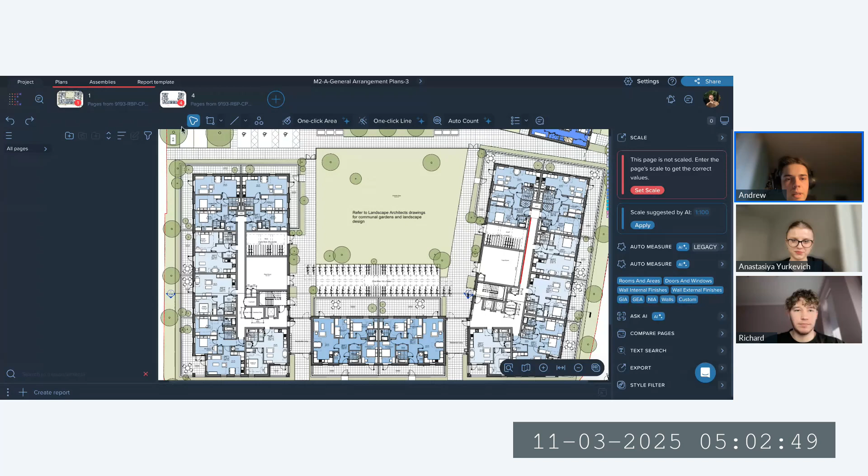So for the auto measure feature, we can see there is a custom category prompt, and we can use it to put our custom keyword there and try automating the takeoff of some specific request. I'll put my elevation plans there just as an example. Let's see how we can work with this one. I will scale my page, and when you open auto measure, you may notice this custom prompt. Once you click here, you will get the field to input your keyword, and we can try different ones.

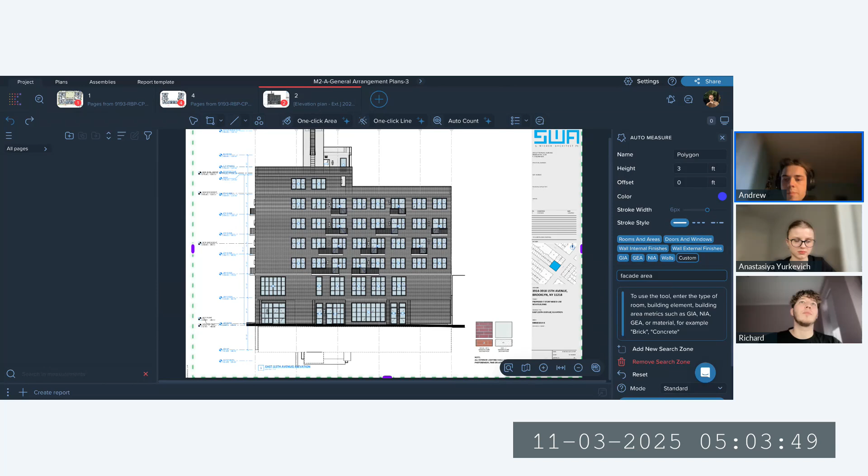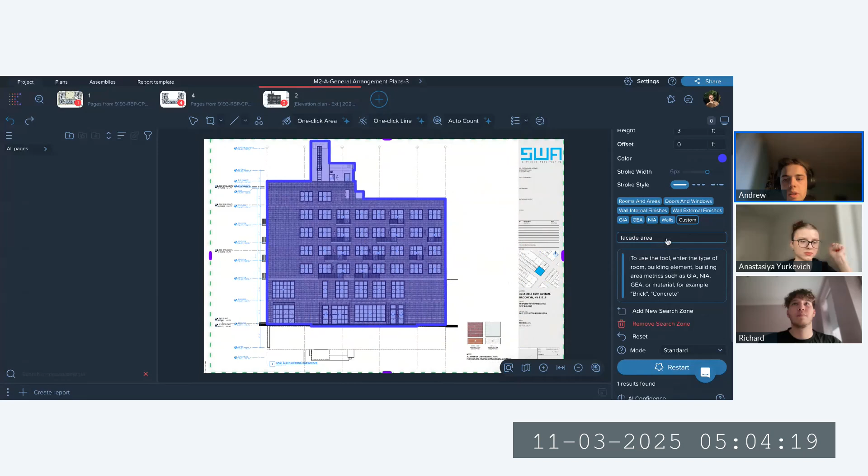Let's say facade area. Now auto measure initiates the search, and we see how it processes the facade drawing and identifies the facade area. So basically, this category is prompt sensitive - depending on the keyword you put there, you will get different results. Once it finishes the takeoff, you will see the suggestion. In our case, this is one result for the facade area, this purple polygon.

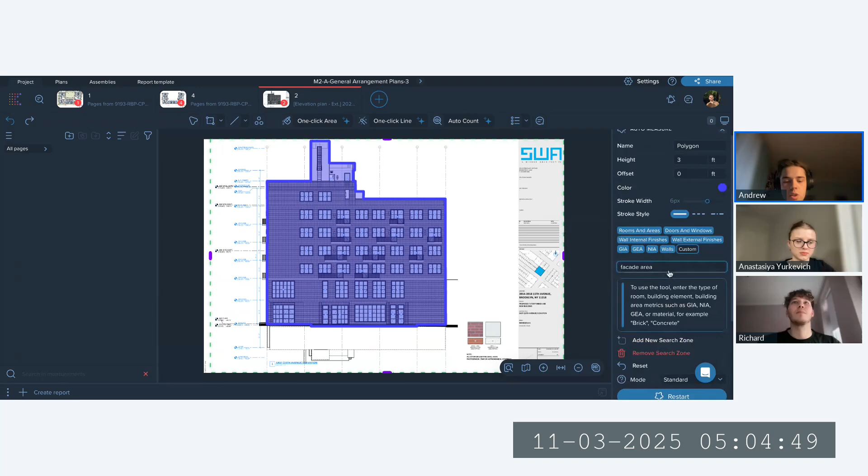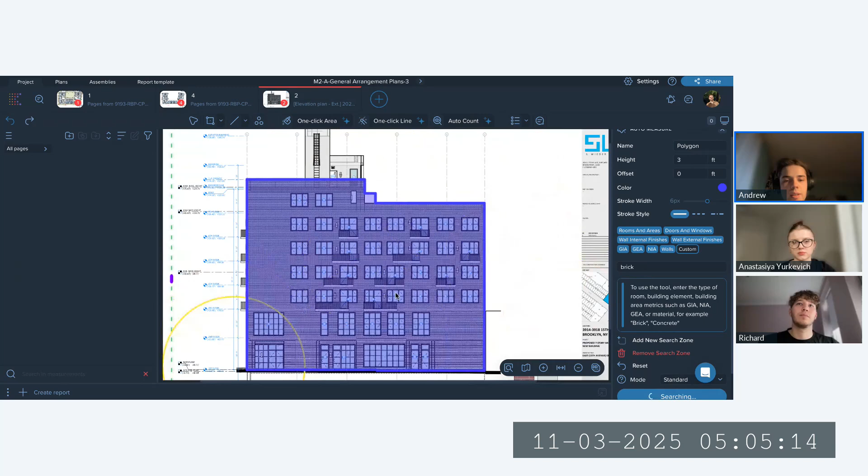We can also try different modes and play around with the AI confidence to see different configurations. But generally, to give an idea of how we can get different results, I will just change it to brick. As you may notice, this area on the roof was included, but if we input the different prompt brick, now we see that the result is different. So it's always worth trying different keywords for different drawings, and depending on the results, moving forward with creating or adjusting them using this functionality.

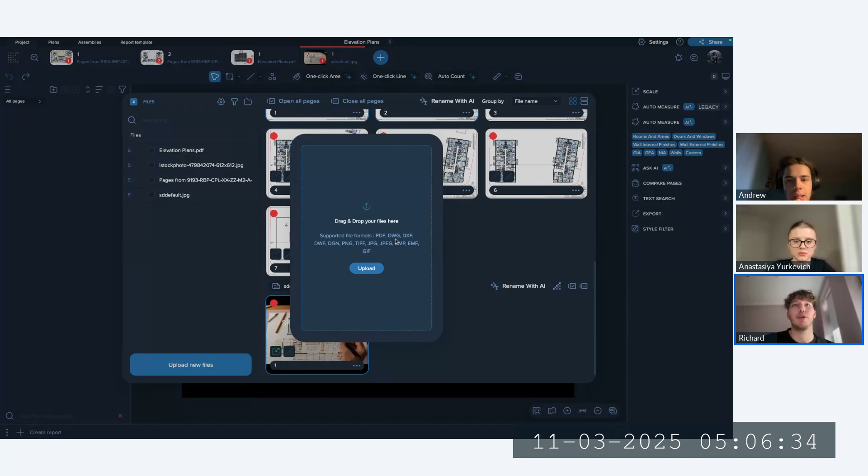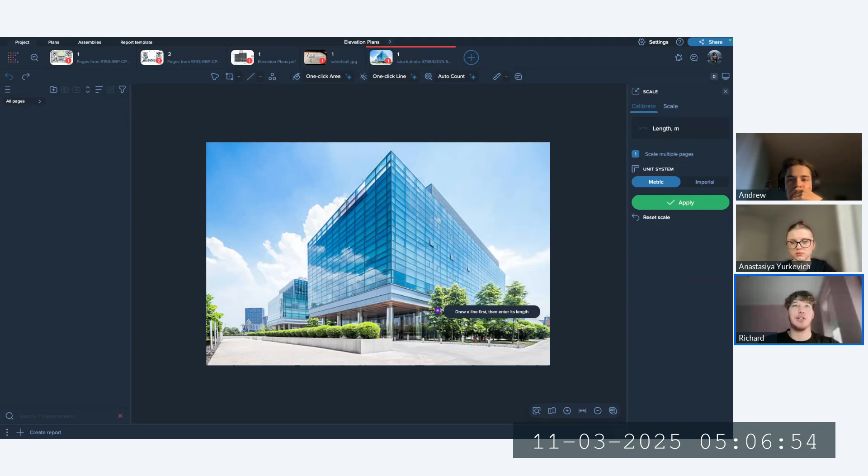You can upload any file in any format, even if it's low quality. Just for example, I took some random picture here, which isn't even a drawing. If we try to set a scale for this picture, it doesn't work to get the takeoffs done. But just to demonstrate that AI will work anyway, if I choose one-click area and click here, AI will try to measure the entire facade from the drawing. I can press create and get this measurement.

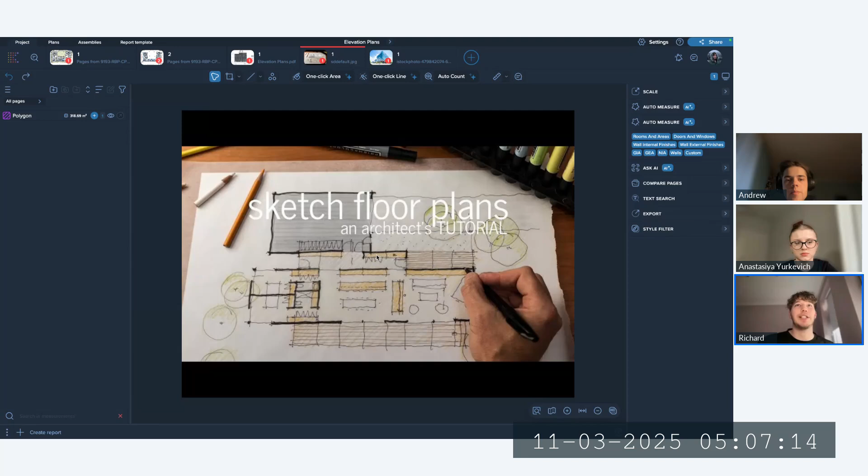As another example, I took another picture from the internet. It's really very poor quality, but even on this kind of drawing, Kreo will work and try to measure. You can easily say you want to include some other part of the drawing, like here, and get this area. Then get another area for some other part here, and make a click. So it's not a big deal if the quality of the drawing is really poor.

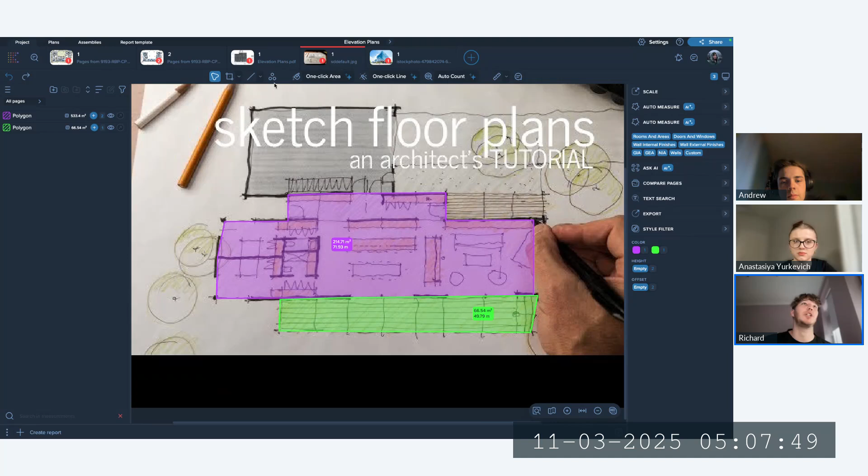Don't worry, Kreo works with any kind of quality, no need to be extremely accurate. But the best file format to upload is PDF, though DWG also works nicely, and pictures work okay too.

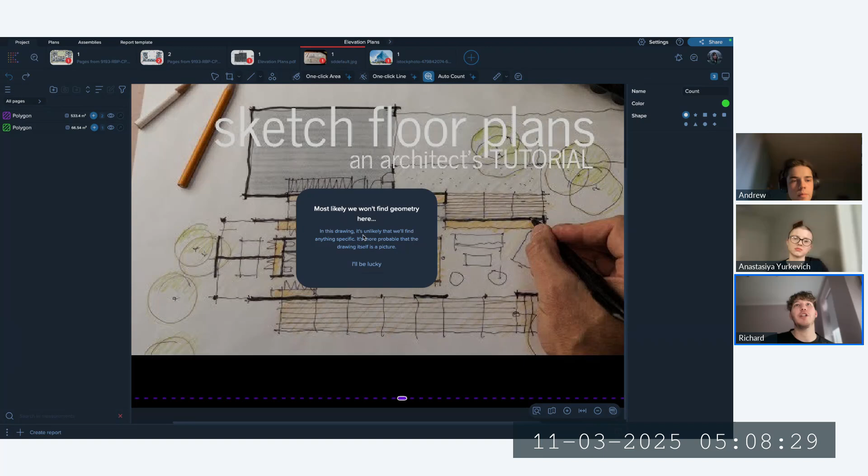So auto count works only with geometry, and you can see this message here. If you press auto count, it says most likely we won't find any geometries here, so you get a notification that this feature wouldn't work. To make sure auto count would work, you can choose auto count on a proper drawing, and now you don't have any notification.

If you highlight something, you see in yellow and red all the geometries which will be taken into account while searching. So all features except auto count work on any drawing, but auto count doesn't work on pictures. Low quality drawings are okay, but pictures, no.

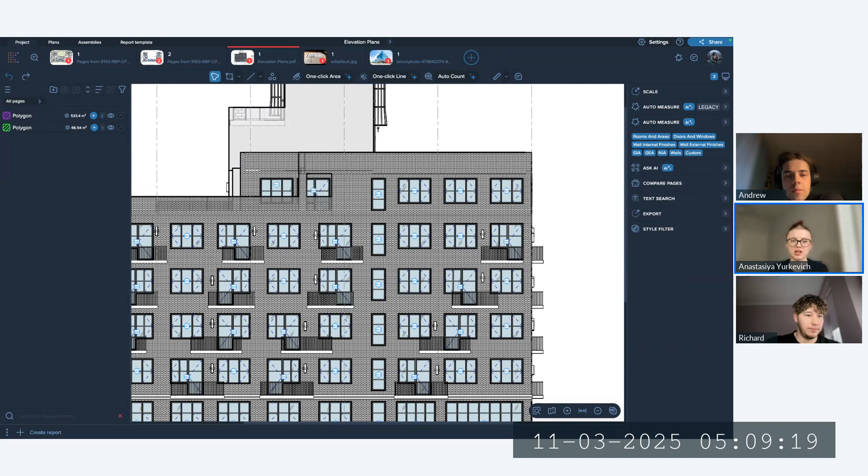That's it. Before you switch to a different drawing, we have a question - I believe it was referred to the previous one that Andrew answered. Can you omit windows? If we build a facade and measure the facade area, can we remove the windows from the polygon? I believe the question was about this part.

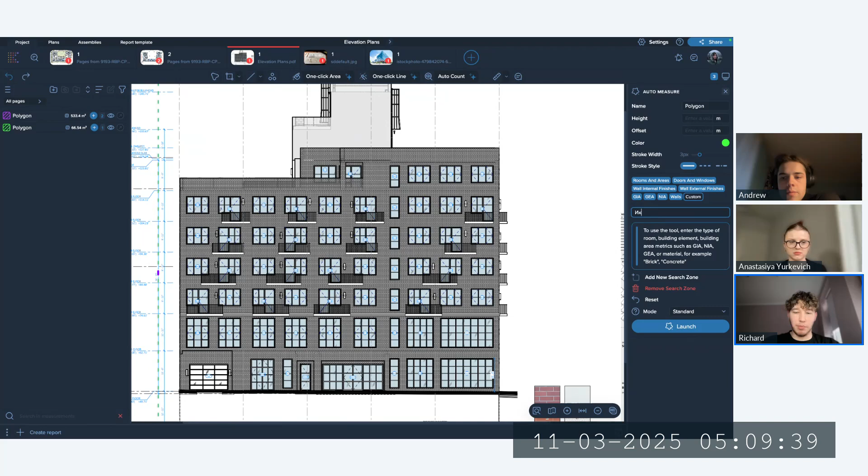So here again we have a couple of different tools like auto measure or one-click area which can give you facade area. As Andrew already showed, I go to custom category here, and input like brick. Kreo will go through the drawing to measure this particular elevation.

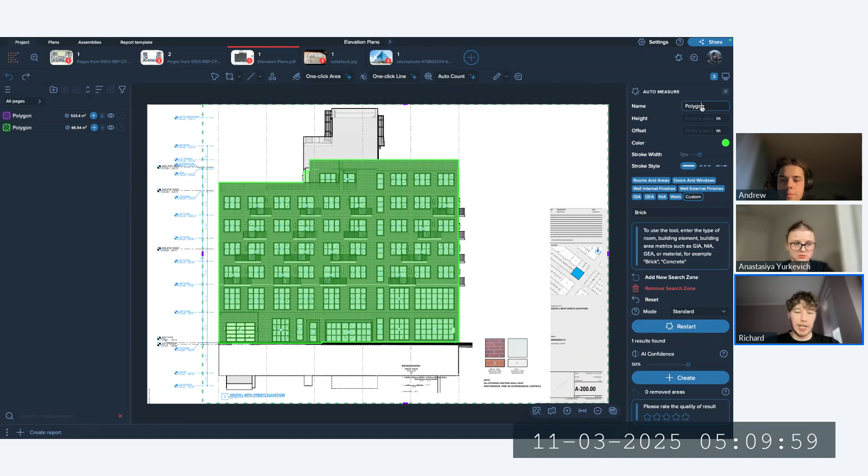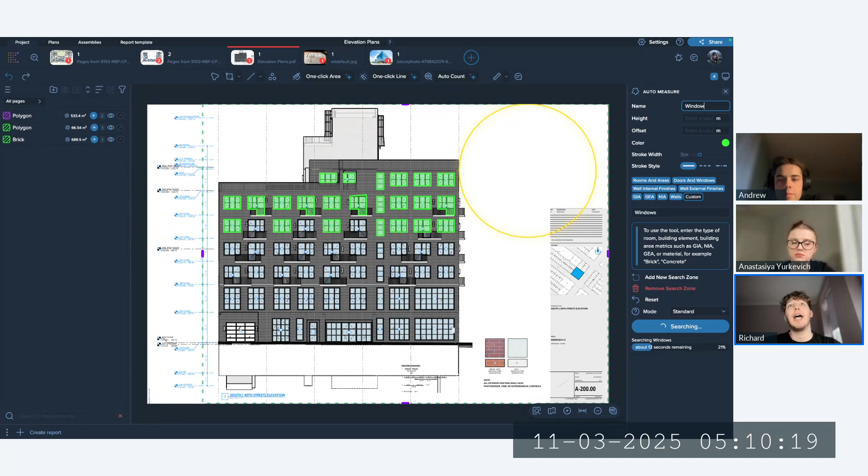Then we need to get another measurement for our windows. So window areas here, let it finish for a sec. I give it a name, brick as an example, and press create to have this measurement done. Then I go here and input my windows, press launch to start the AI. While waiting, I'll rename my measurement, window as an example. Now AI goes through the drawing trying to measure all the windows.

Then we can deduct all the windows from the elevation area. I can try to use AI confidence if this area is not included - AI confidence allows you to control how many measurements you get in the end. Then here I press, let me change the color to purple, create, and now I have both areas for my brickwork and for my windows.

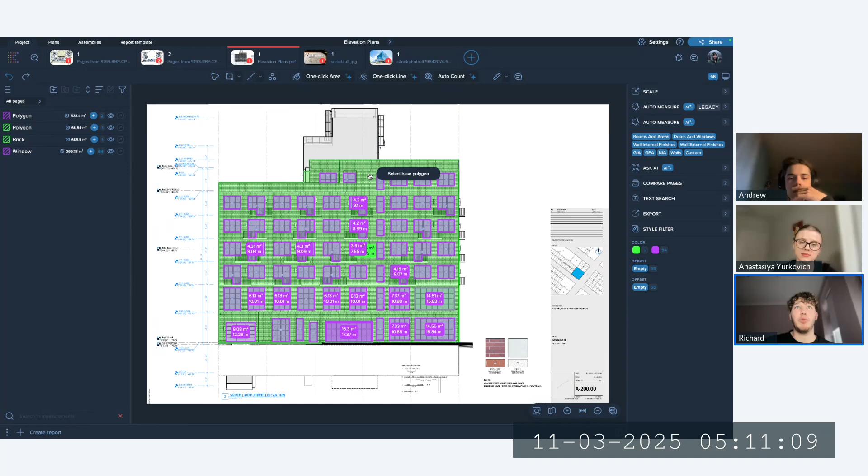What I do next is choose all the measurements, and on top I have a subtract feature. If I press subtract, Kreo asks me to select the base polygon - the polygon from which I want to remove others. I click on the green one because this is my base polygon, and here I have some options.

Keep polygons like my windows - if I want to keep them, but just for demonstration I'll unselect this option because I don't want to keep windows, and press apply. Now I have all the areas deducted. The same works if you want to deduct just one area or lots of different areas from the entire elevation.

Yes, and it works with pretty much everything, not only windows, but kitchen worktops and everything, right?

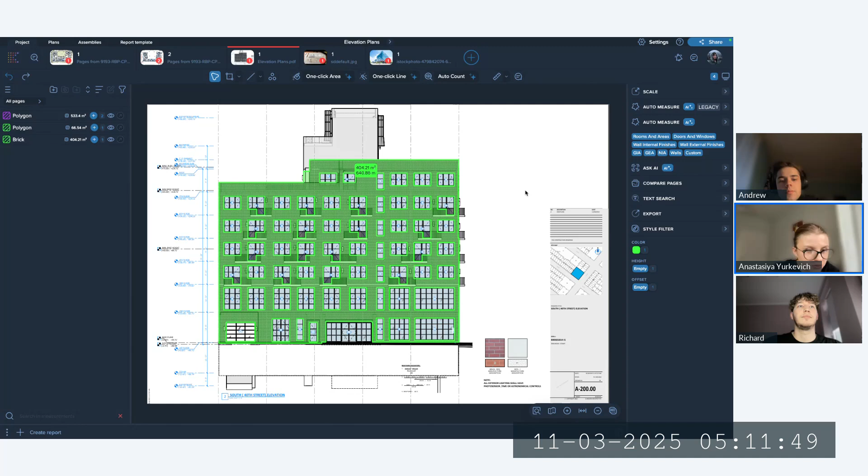Let's proceed with some other questions. I saw a question about the roof pitch, how to measure roof area which is pitched on a plan view, because my previous software allowed me to input a pitch value in degrees.

This is really nice question about the pitch. Let's say we have some area with a pitch here. At the moment, we don't have a default pitch option as an input, we only have height. But there are two main ways how to input your pitch.

First of all, Kreo has a spreadsheet page. You can move your area into one cell, move to cell area, and then input a formula with sine or cosine to calculate this slanted area.

Or another way is to go to the item assembly database and set up a formula which will calculate your pitch. As an example, I have a floor, but I can duplicate it and name this floor as a roof, with all the same things.

So here I can add my pitch formula. Pitch is usually a number, so I add pitch, and I know it's in degrees. Let's do it like that. Great, so now I have pitch input in my roof item.

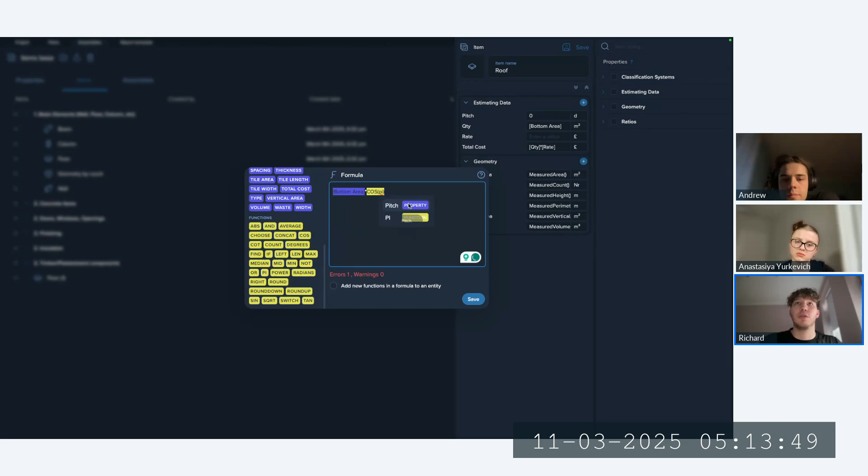What I can do next is take this pitch into account using some formulas. We have default functions which allow you to measure it. I say like that, and then I need to input my pitch, so you'll get the slanted roof area for your measurement. Let's see how it works, I press save.

Now I have this area. I press choose and assign my roof item, so now I have some extra things I can calculate based on this. Let's see it in the table with items, where I can see my quantity and pitch as well.

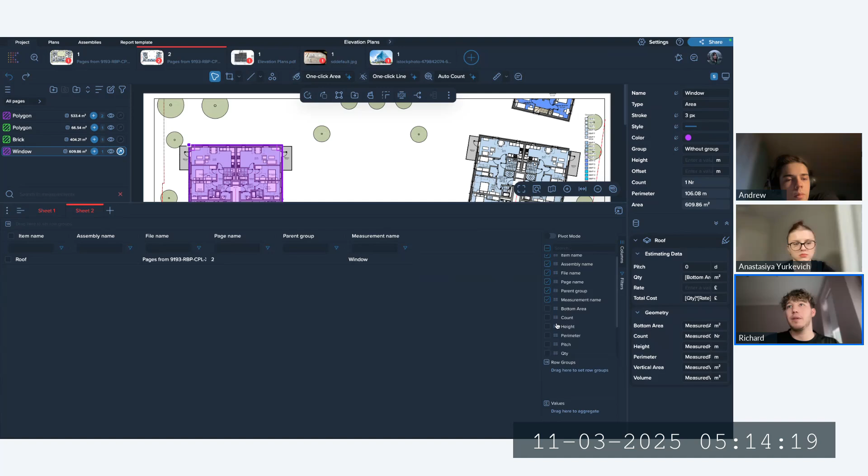You see, pitch at the moment for this measurement is 0 and quantity equals area. But if I input pitch, say 45, I get another value here. So using this function, you can calculate the right value for your pitch.

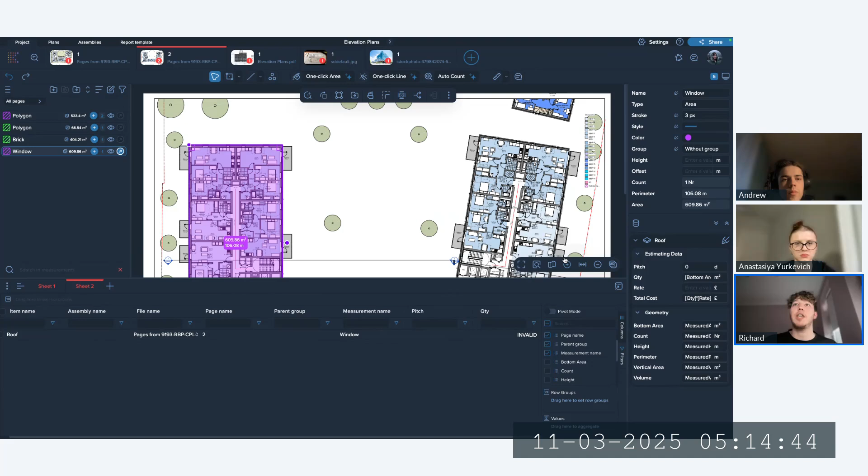If you have any concerns with that, just drop us a message, chat with us, and the Kreo team will help you set up everything about your roof measurement in the most convenient way, whether using the spreadsheet page or the item assembly database. And you only do it once, you don't have to create the item each time, you just create it once and it's always in the database.

I have another question about the database: which NRM sections is your software strongest in and which is weakest, and why? If you mean about AI, basically AI can measure anything related to any section. Tools like one-click area, one-click line, and auto count allow you to measure mostly any type of measurement, whether linear, count, or area, for any type of drawing.

As an example, one-click area works for anything. If I need to measure this area, I just make a click here. Now AI analyzes the entire drawing, and now I have this area. In the same way, you can go to any other drawing and use one-click area to get any other thing.

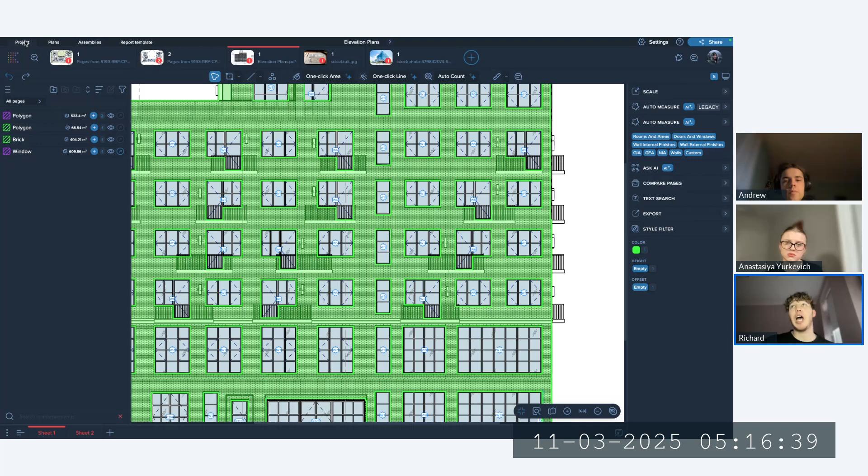In Kreo you can have some kind of breakdown property - this is how it looks by default, but you can extend this with your own extra detailed code. So basically any section of NRM can be measured in the same way, not a big deal. The only exception is auto measure, because that works mainly for chapter 2 and 3. If we speak about MEP sections, you need to use other tools, like auto count or text search.

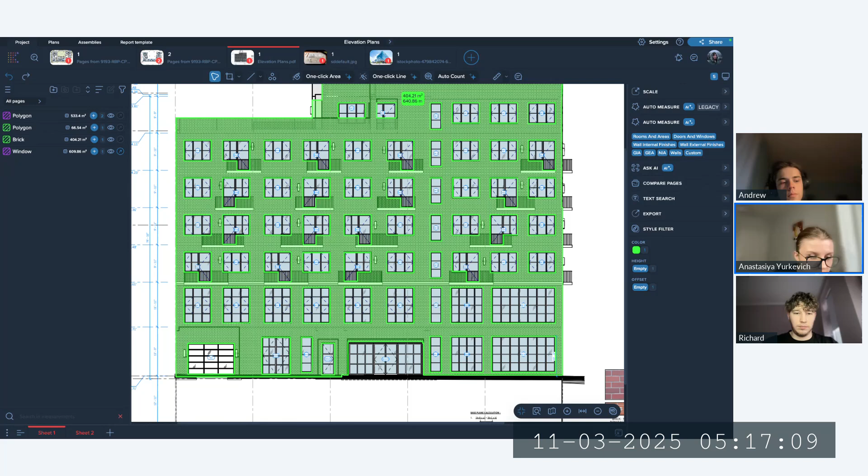I have two similar questions, so I'll ask them together. First, how does your model handle project-specific conventions and unique measurement rules? How do you offer users the ability to train or fine-tune the AI on custom drawing sets? And second, can the AI learn from our past projects to improve future takeoffs? Can the customer train the AI on their drawings, and will the AI learn from the work done?

Yeah, this is one of the most famous questions, I would say. If we speak about automatic training, AI doesn't learn from the measurements you do, because in some cases you might not do it exactly as it should be, maybe to save time or stuff like that.

So AI only takes into account the drawings included in our dataset. If you see something going wrong on your particular drawing, let us know using the email or chat with us button, and the Kreo team will include your drawing in the dataset to support that kind of drawing too. At the moment we have about 1 million drawings in the dataset. Most floor plans or elevations are included, but some specific, overloaded drawings with lots of information can go wrong. We're constantly teaching our AI when we face new drawings.

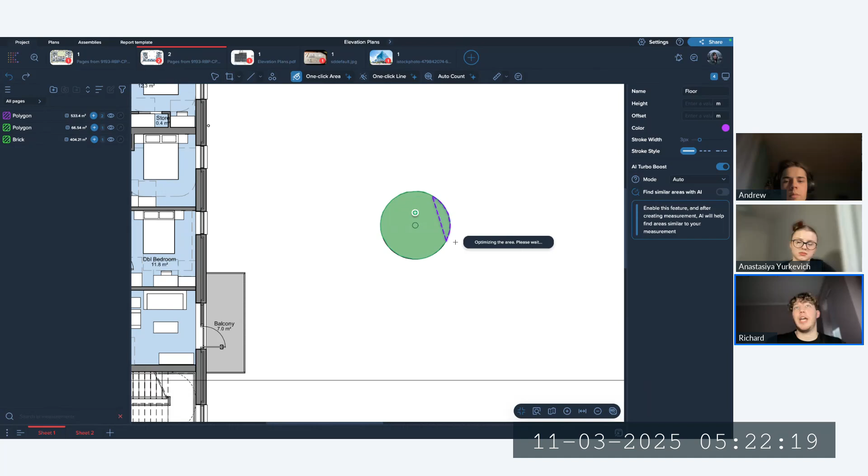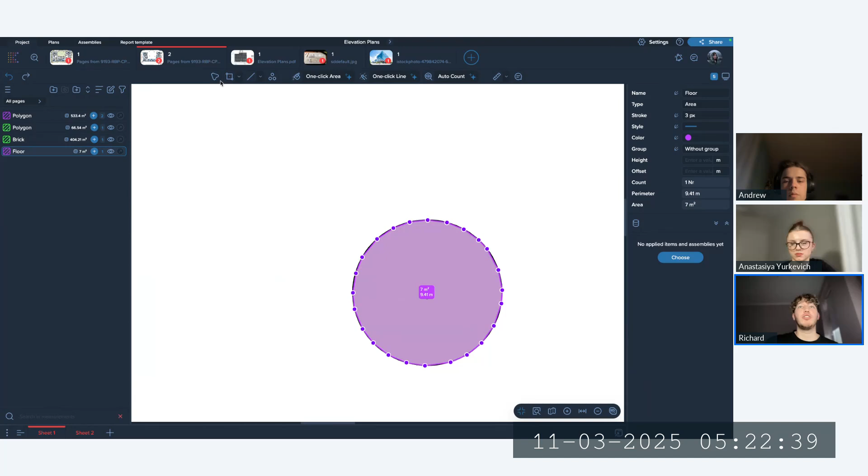Okay, so basically, if you have any kind of shape like that, AI can measure such kind of things without any dots here. So you see, AI measures this circle perfectly, but if we speak about the arc tool in Kreo itself, no. So if you need to measure any arc, you just use regular tools or AI tools. They will measure it perfectly, but you can see here that we just have lots of linear sizes, which are smaller.

So in the same way, you can measure it manually, just like that. As an example, you choose the polygon tool and just set a bit more points, just like that, to measure kind of circle shapes or arcs. So this is how it works here. Again, AI has no issues with measuring this in a really nice, accurate way. Thank you for the question.

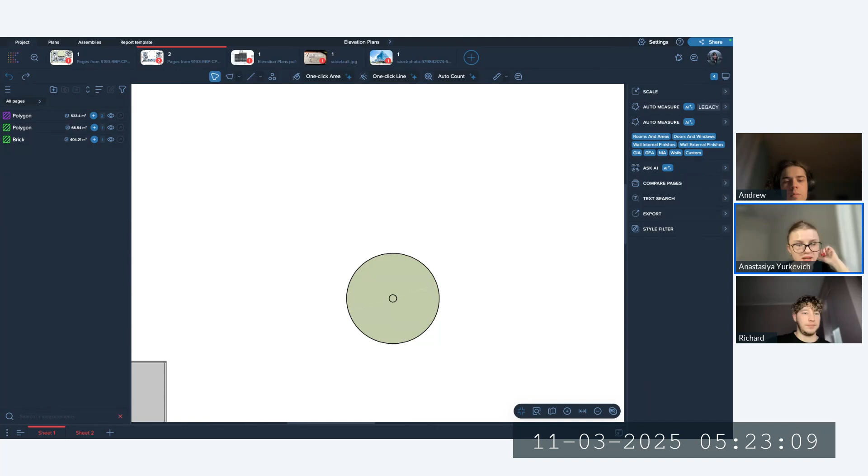And the next one: can we export the markups to edit on other PDF editing software like Bluebeam, or are they only editable in Kreo? So yeah, all the measurements are editable only in Kreo. If you export all your measurements here, you'll get a PDF with the measurements on top of your drawing.

Here you have lots of different settings: which pages you want to export, which styles you want to apply for your drawings, which measurements - all or only visible, because you can hide some measurements and not export them - and some other options like, for instance, company logo, which you can export like a watermark and so on. But all the measurements will be non-editable after you export them in the final PDF output.

And we have some other question. Can you show me some examples of the different formats that data can be exported into from the Kreo software? Say, for example, if I want to transfer data into an XLS format, so Excel format, and estimating programs.

So it's about the estimation export. Here you have, first of all, a couple of different types of reports. As I already created, we have a spreadsheet page. Here we'll also have some table with measurements, which is very configurable. By default, it's just a flat list of your measurements, but you can easily configure how it should look like - just as an example, maybe where I want to see only my measurements and the total area.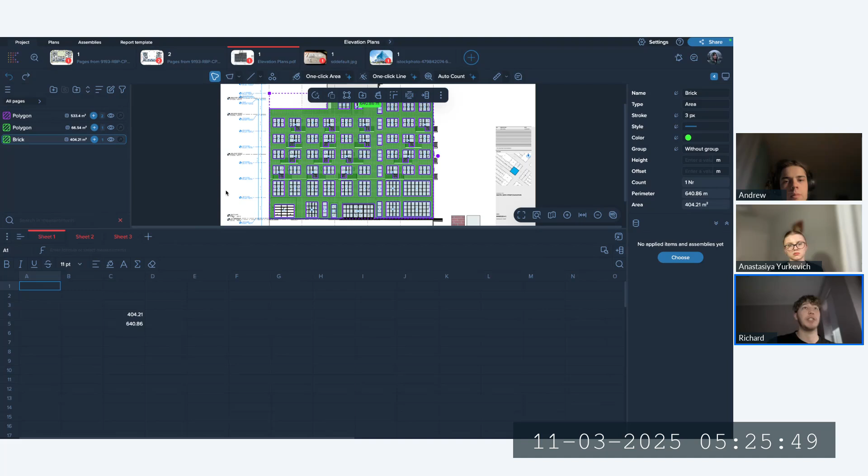Additionally, you can export it to CSV, and also with our API integration, we can set up direct integration with any other software you would like. But if we speak about output, the main file format which is available by default is Excel, and you can also export this to CSV, in addition to exporting your drawings to PDF as well.

Thank you. Can I add custom information for each markup? For instance, a specific column to add the specification reference of the item I'm measuring. Yeah, here we have a special item assembly database, which is done just for that particular purpose. So how it works in the item database: you have properties, and you can create any property.

Just as an example here, you see I have NRM breakdowns. I have some estimating parameters like quantity, rate, total cost, maybe type. And you can use any other parameter, which can be text, numeric, or, like you can see here, my type is a single select list, from which I can choose one particular value.

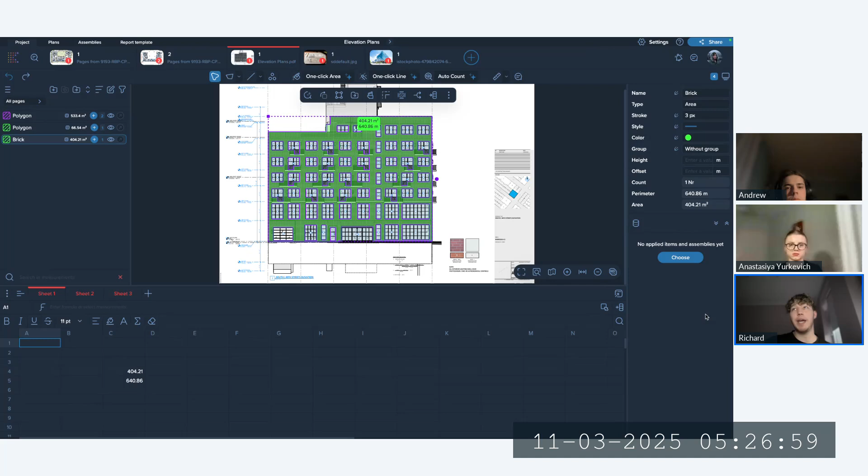So the only thing is to set up your database initially. Again, here we can give you as much assistance as you need. But then after you set up some custom properties you need, you can fill them in for all the measurements here in this right panel, the same as you have these default properties. In addition, you always have this option where you can add something new right in the Kreo project - you can add a new item, add new properties, and stuff like that. So this is how it works.

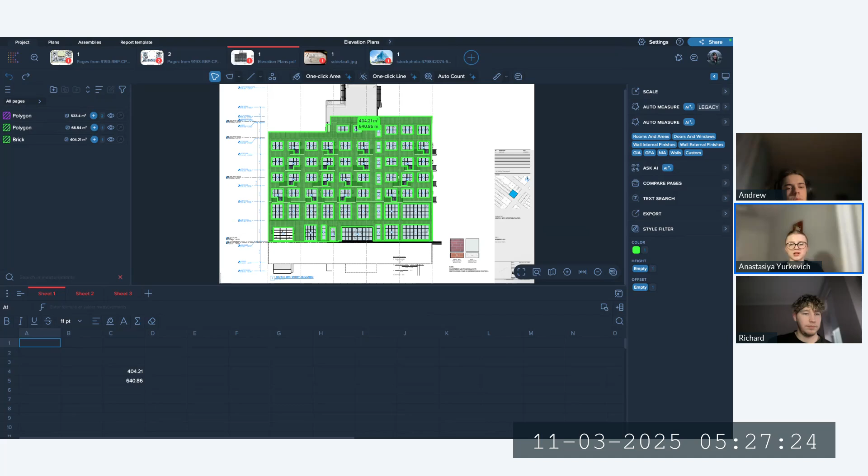Thank you. And I have a very common question: please show us how to scale all pages at once.

Yeah, so in Kreo, if you set a scale, first of all you can see this scale here. It means that this scale is applied for that particular page. I can open this page, and if I go to the scale option, I go to scale multiple pages.

So this menu allows me to choose some other pages which have just the same scale. If I see that these 3 other pages have the same scale, I simply click on them, or I can choose the entire file here, like that.

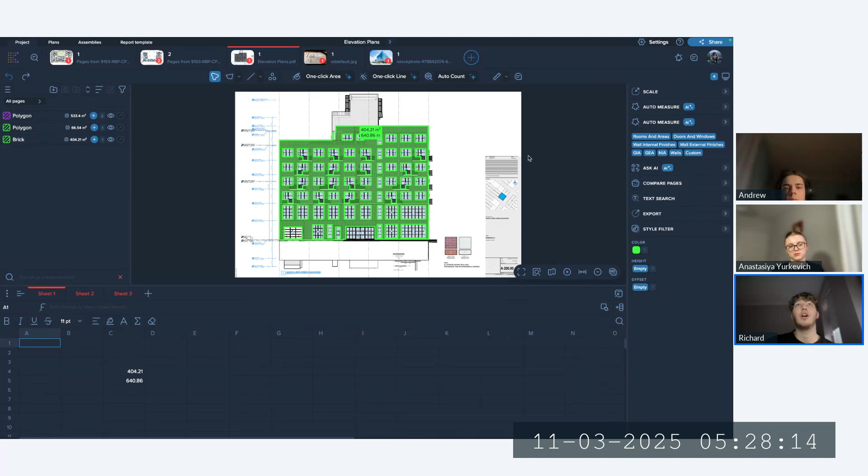So I have 4 pages selected, and now if I press apply, I apply the same scale for all other pages. I just do it like that, go to File Manager, and now you see all these 4 pages are scaled except this one.

So the same, you can go to this page, go to scale, scale multiple pages, scroll here, click here to scale the entire file or choose the entire file. In that way, all the pages are selected. You can see 7, and press apply to scale all of them at once, like that.

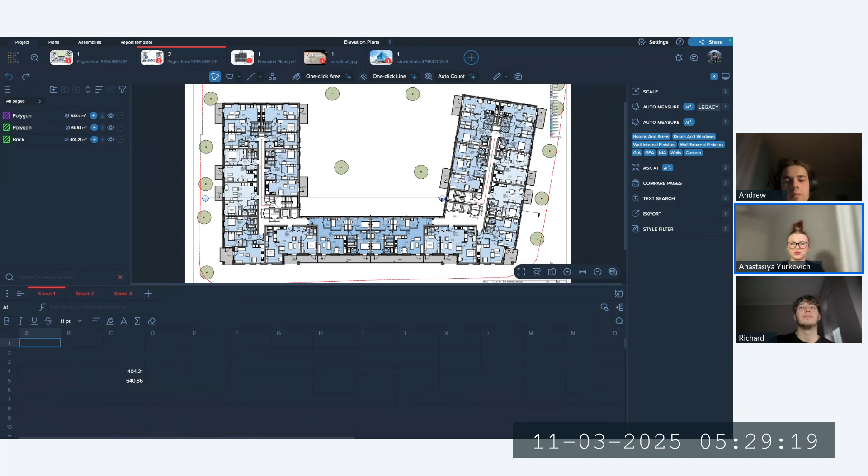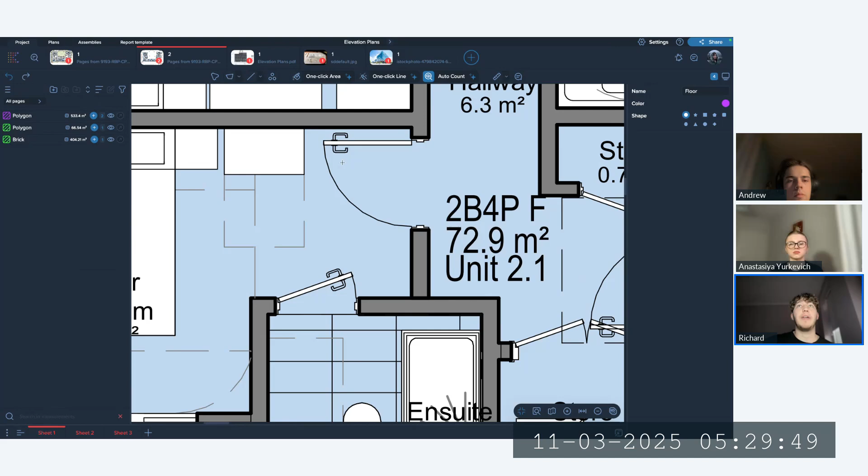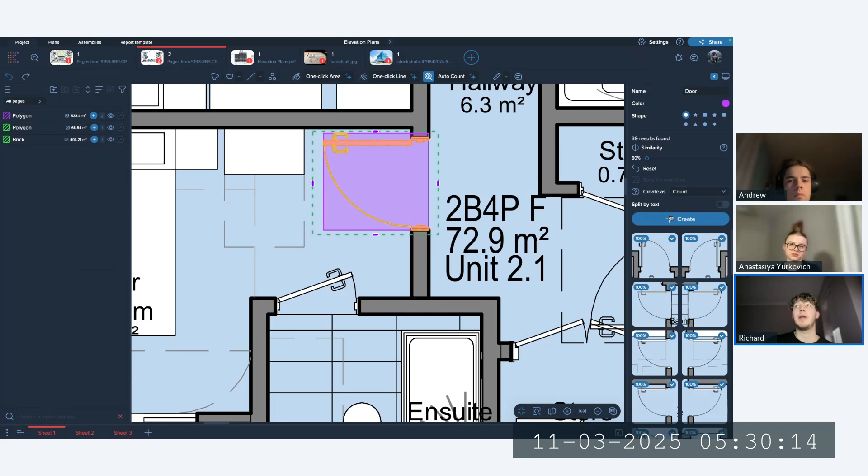With auto count, I can highlight this door, and I can press search to find all the same doors for this page. Let me rename my measurement, door. And now I have a really nice button called Save for Next Time. So if I press Save for Next Time, I can easily go to the next page or previous page. I click Save for Next Time, press Create to have my measurements for my door.

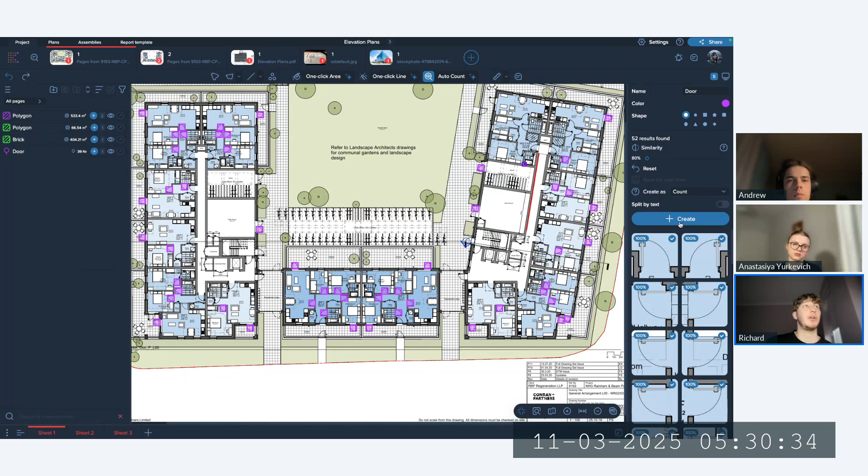I go now here, I go to auto count, and here I have previous launches. I can click on that door, and now Kreo will automatically launch the search based on your previous drawing, but for the same element. Now you see it's correct, you press create, and now you have two measurements from both pages. The same works with elevations here.

I want to highlight another important feature: in case you have any text annotation, you can use auto count for it as well. I just highlight this element on my drawing. I press search, one second. And now you see Kreo finds all these elements, but they are included as one category, W5, 6, and so on.

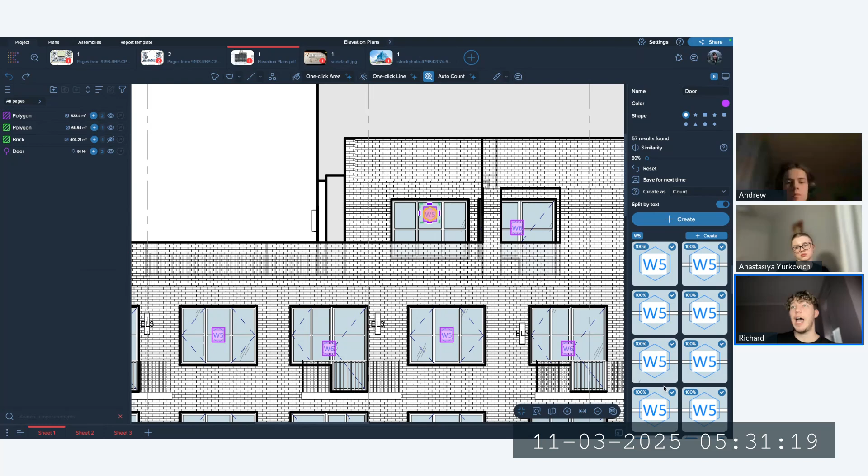Then I can choose here special options, split them by text. And if I press split by text, now all of them are divided by the text inside. So you can see that they are basically split by all these types. Before pressing create, I press save for next time, press create now here, and I have all these types here.

Now I can simply go to the next drawing from the set, let's say that one. Again, go to auto count. I have already saved search, click on that saved search, and now Kreo tries to find all the same things, but on that drawing. Please note that here, if some elements are not highlighted, it means that they have another geometry.

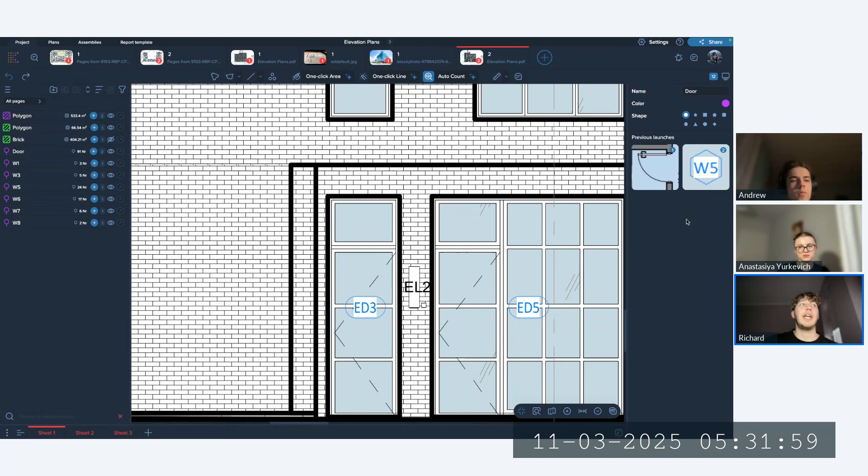So now I use these things to count all the same things, press create, and I have all these measurements from both pages simultaneously. So you can count geometries on multiple pages, not at once, because it would be really hard to validate them.

You see, if I go to this drawing and launch auto count, I have lots of different results. You need to validate them and make sure that all of them are correct, that they are exactly what you wanted to include. And at the same time, you can easily go to the next page with no need to highlight any other geometry again.

You just choose from the already available list. It's some kind of legend of your searches. And you just click on this type, on that type, and find all of them on the next drawing.

To be honest, it's one of my favorite updates. I believe everyone who works in MEP or counting doors and windows should go and try this new auto count update, because I'm talking about it all the time. So yes, hope you like it.

A couple of other questions. Do you offer API access for firms that want to embed takeoff automation into their internal tools? Yes, we have API access. We have our default API, and we can also provide a customized API based on your particular needs. You can integrate Kreo with another software using API or any other tool, so not a big deal at all. I believe the person meant to ask about the takeoff AI tools specifically - can we create an API to embed takeoff automation? It depends. It would be better to hear the particular request, but I think that the answer is yes.

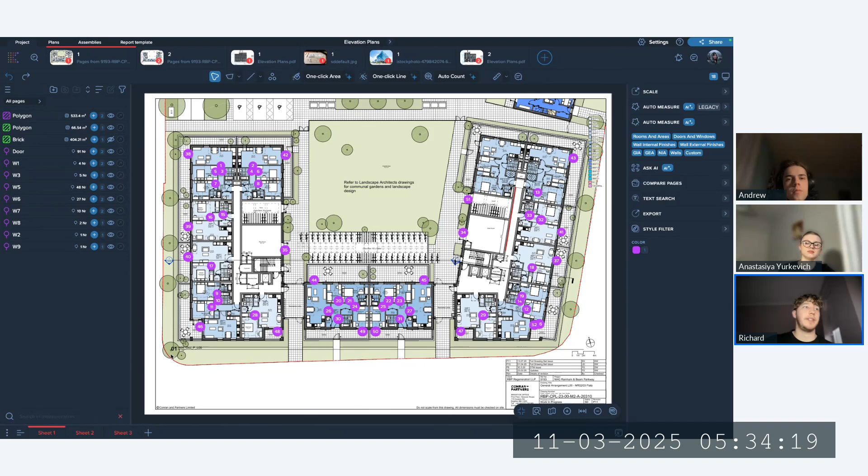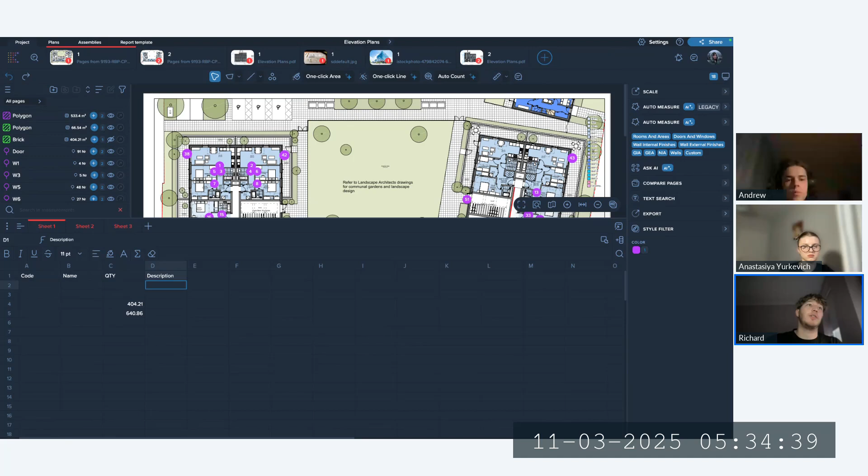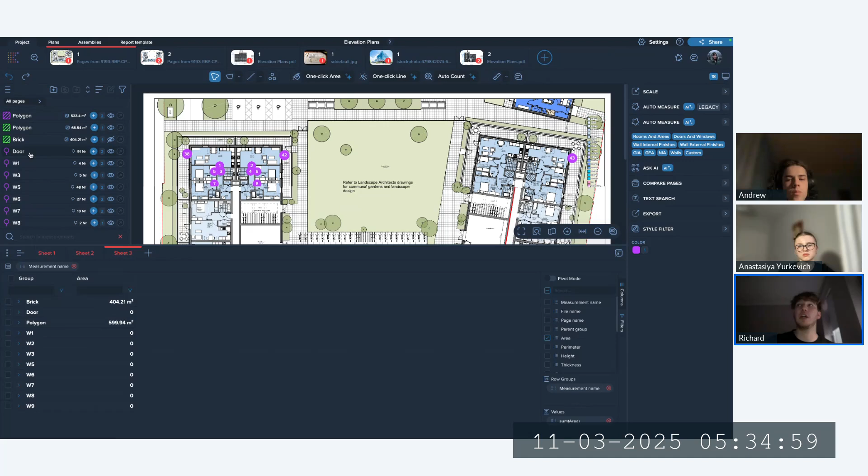So how customizable is your platform to align with our internal standards? Can we add descriptions to the markups before export? Yeah, here it works just in the same way. If you use Kreo spreadsheet page, you can have a couple of different columns just as in Excel, like code, description, name, quantity, price. You can export this to Excel just like that. You can also use these tables to export all the measurements in the way you need, with options like file name, page name, parent group, and so on. We don't have a description field for the measurement by default, so you can use measurement name, or group name if you use groups, or go to the item assembly database and create a description field as an additional property for your measurements. In the end, you can easily export all the data in any format you need, aligned with your internal standards, with all the descriptions in any order you prefer.

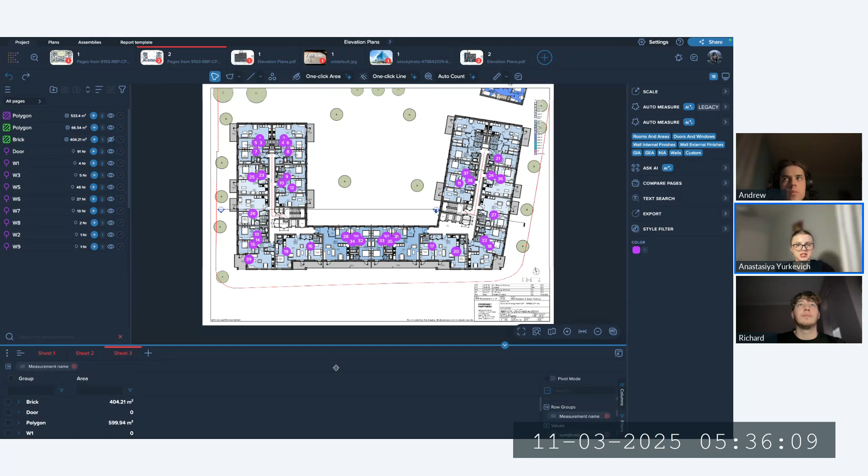I just wanted to add that in the database you can add pretty much everything except for images - codes, descriptions, prices, markups, everything can be added there. Everything you add will come as a column, every property you add, and you'll be able to see it in your items report. That's a question we've been asked a lot of times. Everything you create in your assemblies database will be presented in your items report later - description, codes, markups, cost, total cost, everything. And if you need our help adding anything to the assemblies database, just let us know. Andrew or Richard will have a call with you on what to add and how to see it in the report. It's not a problem, just let us know if you want to build a database - we will help you.

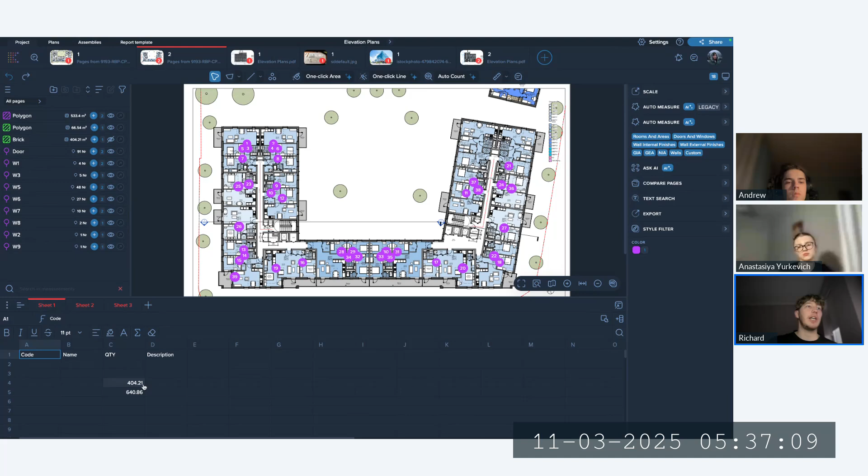In relation to exporting data, can you export all measurements and descriptions as one file for a preset of measurements rather than individually? Yes, again, it's completely up to you. Kreo outputs allow you to configure any kind of output you need. If you export a spreadsheet page, you just choose exactly how to organize your data, because it's just a spreadsheet page. If you use the takeoff report or table with items, you have a bit more limited options, but anyway you can export all measurements and descriptions as one file - not a big deal. You can split them by descriptions rather than measurement name, using description as the main parameter, but initially you need to create that description field in the database, as we said before.

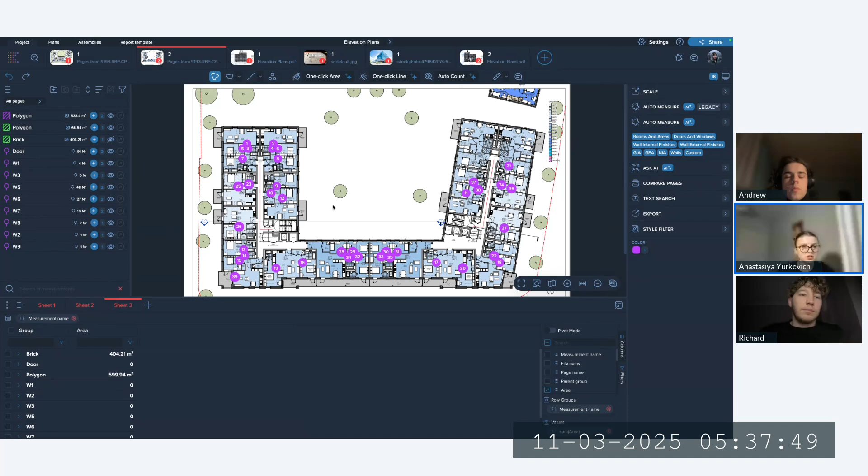How do you manually include the missing doors on auto count? Okay, yeah, this is a nice question here.

If some elements are missed, first of all, it means that maybe they have another geometry or another size. You can see on this drawing that this door maybe is missed, but if we choose auto count and highlight this door, press search, Kreo will find all the same doors from the drawing. So it's just another type. These doors are wider, bigger, so they are another type. You can create them as another door count if you need to unite them into one category.

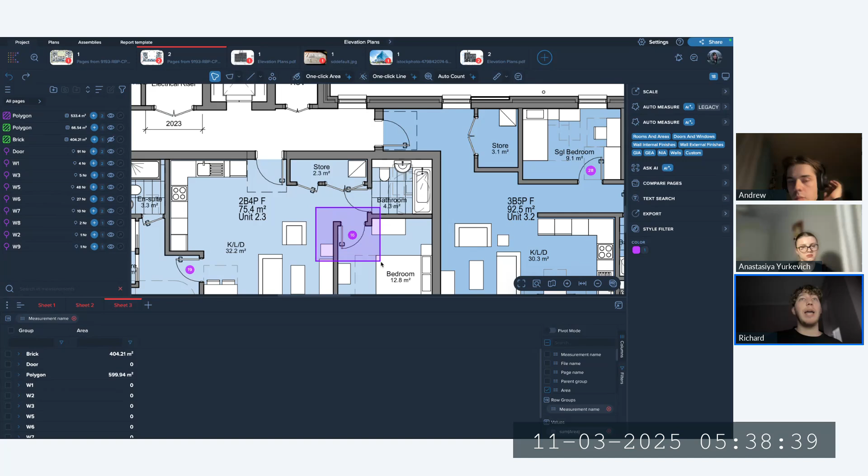So if you speak about the case when the door is really missed, I mean we don't have enough doors, you just choose the particular count you want to continue, and here you have a button called continue. You just continue creating points manually, adding or editing the measurement which was created by AI. Not a big deal at all.

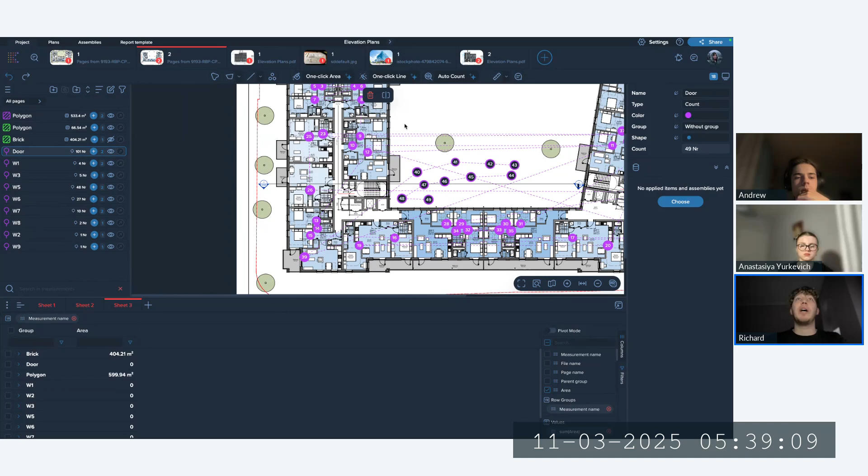You can add these points, and vice versa, you can delete some points. All the modification tools are available here, so you can simply choose these points and press delete, or split them into a separate count. Again, if something is missed, make sure that this is just the same thing that should be included, and if yes, you can easily include them by launching auto count again for another geometry, or include one or two points, or as many as you need, using the continue feature.

All right, thank you. The other question: what feedback have you received from clients who switched from other AI takeoff tools?

We receive really a lot of feedback on that point. First of all, it's the speed and the lots of different categories that Kreo can measure. If we speak about tools like one-click area, one-click line, and auto count, they work for any drawing, and you are not limited by a drawing type. You are not limited by anything here.

It works for any type of drawing, any quality, and so on. Additionally, Kreo is a very comprehensive and flexible software. You have a really nice item assembly database which is mostly unlimited, where you can create any parameter to keep your price there, formulas, anything else. Additionally, you have a spreadsheet page, so if you prefer, you can use one software to build your report and keep all the links between your measurements and your output.

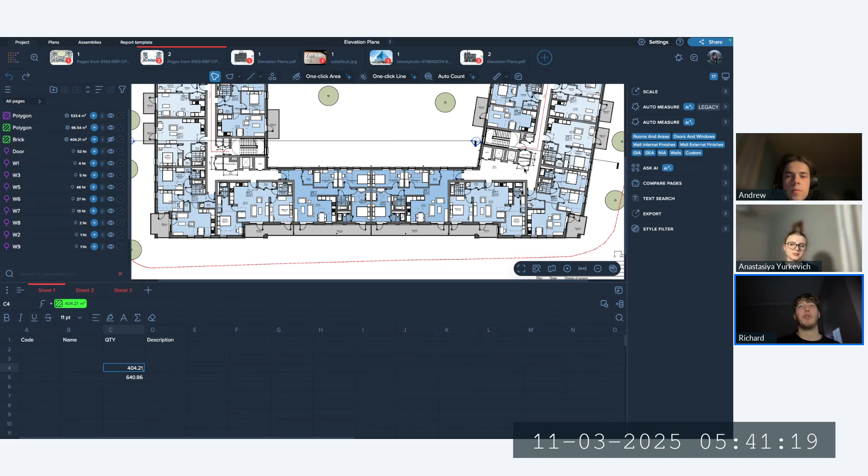Additionally, we have really nice collaboration tools because you can collaborate live in your project. I can basically mark Anastasiya here and ask her to see what's wrong, and she can reply for me later. So basically, AI here is not limited to the drawing type, quality, or type of takeoff you need. Additionally, Kreo has lots of extra features like the item assembly database, templates, and collaboration tools, which allow you to get the most out of your takeoff and estimation process.

If I'm being realistic, most of our clients are switching from either manual or digital takeoff. AI is something very, very new in construction, so clients are mostly switching from something more manual, for example manual digital platforms or pen and paper, to something AI based.

Usually we get feedback from clients comparing different software during the test trial. What I hear a lot is, as Richard mentioned, the database and the estimation capabilities - that's not what each platform has. Also there are some platforms that are trade specific, which is great, for example for MEP or for something else.

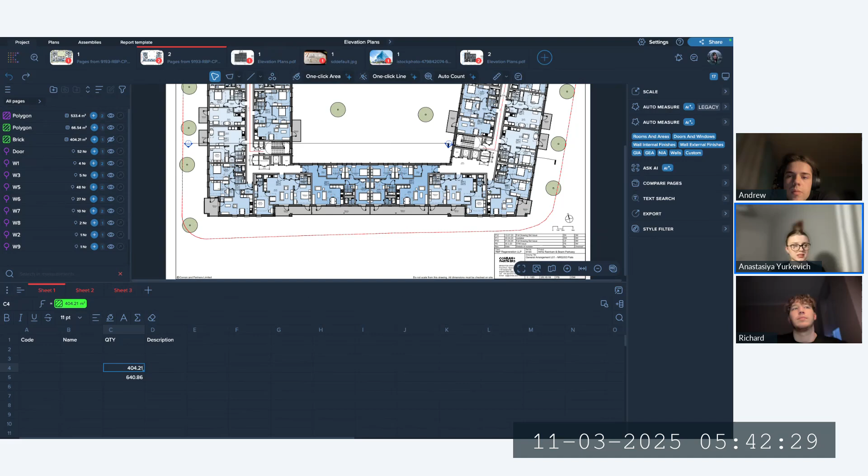But in Kreo, we try to cover all the trades, so you can work with everything from structural to floors, walls, landscape, and everything. That's what our clients mentioned, because especially general contractors need to work with every type of drawing. So we try to cover pretty much every trade. That's the feedback I've heard.

It's probably worth mentioning the centralization users get when switching to Kreo, having their entire process from takeoffs to estimating and getting the output in the desired layout - the report templates feature. There are some users and customers who try to achieve some really specific kind of output, maybe proposals in PDF format or some complicated cost plans with many tabs and different breakdowns.

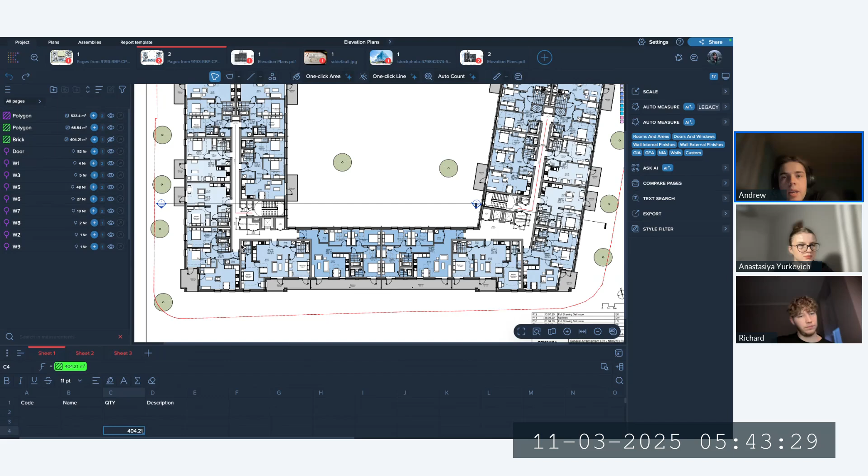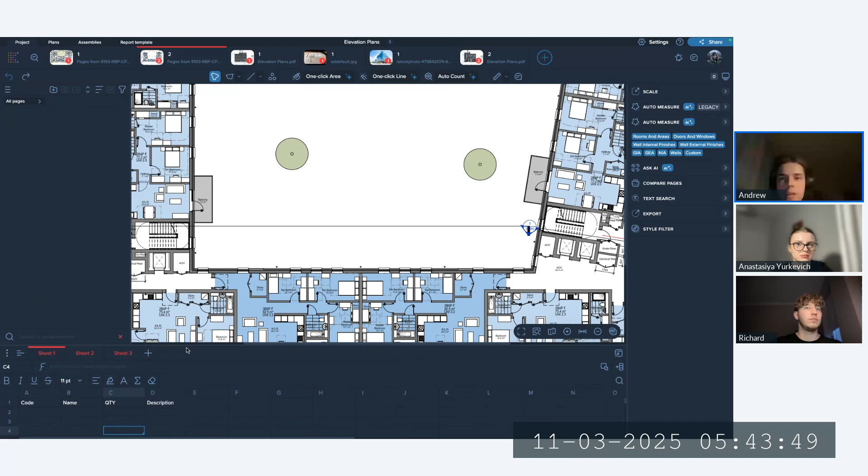When it comes to such requests, we're always open to a deeper level of collaboration, and we suggest the service called report templates, where we perform a feasibility study to see if this layout may be achieved on the back end of Kreo, and our team implements the report template feature when it's possible for users to get the final output using the template.

The entire process looks like this: the user opens the project using the template, then uses AI features to get the takeoffs, distributes the results between groups within the preset or template, and then just clicks export and receives the final proposal that may be sent right away to their customers.

Thank you. I have another question, which I don't really understand, to be honest. Maybe you guys will. How can I do an estimate over Kreo?

So if we speak about estimating in Kreo, basically how it works, you have an item assembly database. This is the first approach. In this database you have all your items that you need to get pricing for, for instance painting a wall. You can have material and labor separated or together. Very simple logic: quantity formula, rate, total cost formula. In this example it's extremely simple, but it can take markup into account and so on.

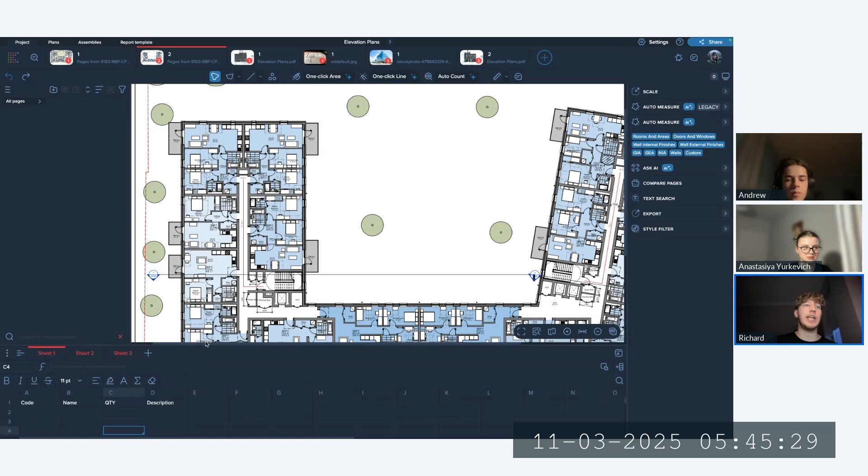Another way is just to have some kind of template in Excel, which can be linked to your measurement breakdown structure. What I mean, here you have some chapter, just as an example, concrete walls. So I can have my concrete walls here, and I just link my quantity field with my group. How it works: I just do group to cell and do volume as an example. Then, for concrete walls, for instance, formwork.

For formwork, as an example, I need my vertical area. So the same, I just move vertical area here, maybe multiply this by 2. Once I fill in this group with my measurement, say height 3 and thickness 0.3, once I create such kind of measurement on the drawing, let's say this is my concrete wall, I press create, and my values are automatically moved here.

So if I have here another column called rate, I can input my price, let's say 100 and let's say 50, and then I can have my total column, which is my quantity multiplied by my rate, and I can easily extend it like that. So the main thing, it's up to you, whether you'd prefer to use the spreadsheet page or item assembly database. Anyway, you can get your estimate here. And then, as Andrew already said, we have a couple of nice special features for exporting to get your final BOQ, proposal, or cost estimate right from Kreo.

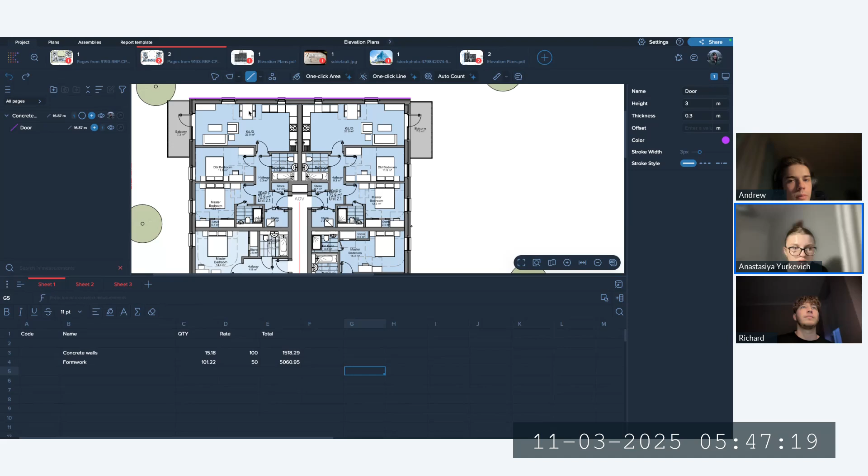Thank you. I have two similar questions again. The first one: do you offer training or support during the trial period? And the other one: what support do you provide in relation to training users? Could you also give me a sense of how long it would take to learn to become a reasonably competent user? The more calls you have with Andrew, the quicker the process is.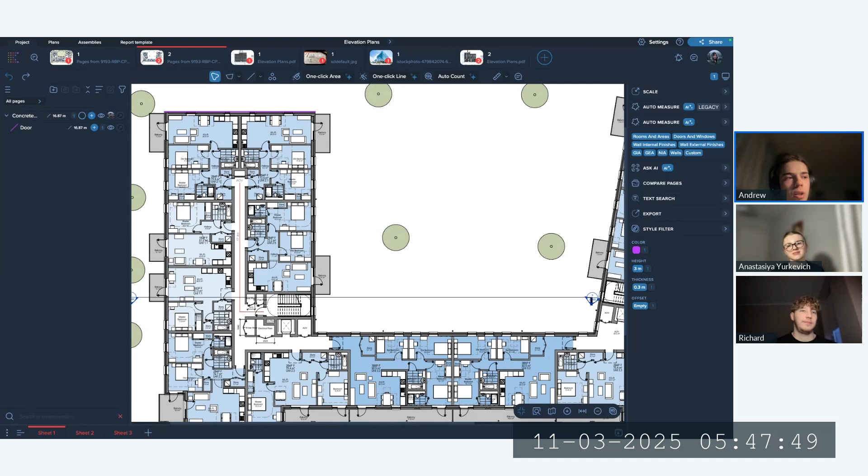Andrew, would you please answer this? Yeah, for sure, we offer trainings and onboarding sessions, and generally during your 7-day trial it's reasonably possible to become a competent user. So to give a range, it takes about 2 to 7 days to become a competent user. It depends on previous experience and the amount of time spent on learning. It's always a good idea to share your materials and previous process description before the training, so our team will have time to prepare better and make these training sessions tailored and focused on getting you to know the software and use it and get the most of it.

So yeah, training support is available once you start your trial, and you have the support chat there, as well as links to book training calls.

Right, yeah, that's what I wanted to ask, Richard. Please show us the support chat, because sometimes it's difficult to find it, but it's very important. Chat with us, and here you can drop us any message to ask your question and so on.

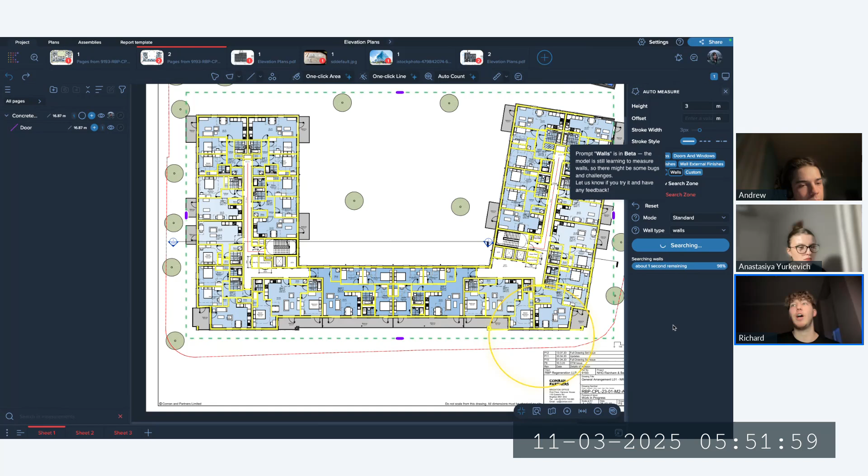I also have a question: will Custom Measure internal partitions? I believe that's the custom category in Auto Measure, and it's about internal partitions. For internal partitions, if you need to measure them by centerline, we have just walls. The walls category at the moment is in beta, but it goes through the entire drawing. I see a very similar question about wall split by types and thickness.

Unfortunately, at the moment, AutoMeasure is not capable of splitting your walls by types, by color from the legend, or stuff like that. But at the same time, Kreo can try to split your walls by thickness. So for that particular category, it can measure all internal partitions along with external walls, internal load-bearing walls, and stuff like that. Then at the end, you press create. If you have any walls grouped, just as an example, one second, I have some group for my walls, and I press create, and now I have all these walls split by thickness here.

Then I can validate. If I don't need some of my walls, I can simply choose all these walls, starting from here to here, thick walls which are kind of external and load-bearing walls, and in that way I can leave partitions only. 250 is also too thick, but here you see, in that way this is how I easily can get all the partitions here. Again, it also requires some validation, because maybe in some cases these walls you don't need, you simply choose them and delete.

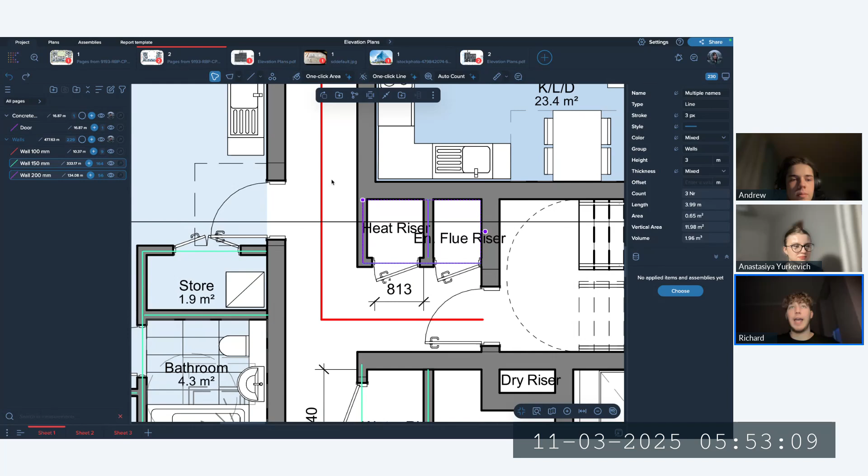But anyway, Kreo AI allows you to get measurements, and then you easily validate them going through the drawing, remove some unnecessary measurements. Maybe in some cases you will need to add something. This is how it works. AI can split them by thickness, but not by wall type, which is written somewhere in the legend and so on. So this is how it works at the moment.

Thank you, and I have two similar questions. How accurate are the measurements in comparison to manual measurements? And the other one, just a moment, I lost it for a moment. Have you conducted any testing in relation to accuracy of meters, square meters capture? For example, if you're producing full bills of quantities manually, say in Bluebeam, would the Kreo quantities be as accurate? I would say...

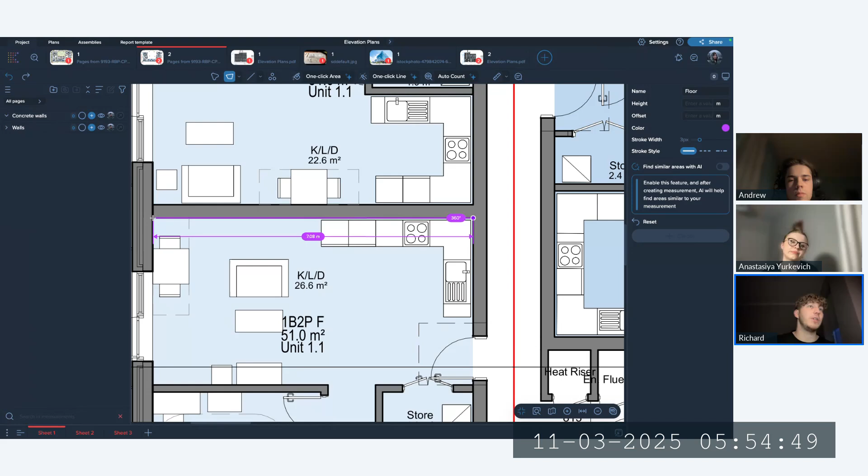Usually AI measurements were more accurate, again after the validation. If we speak about one particular takeoff, it definitely will be at least the same, with the same level of accuracy, because Kreo AI doesn't try to save time or stuff like that. If I zoom in, you can see that each point is exactly in the middle. So AI uses snapping, if it's a PDF drawing, to snap your measurements to make sure it's extremely accurate. Because with manual measurements, sometimes maybe just because of a mistake, or because you want to save time, or maybe some takeoff software doesn't have snapping at all. So if I turn off snapping, I will try to set a point here, but it won't be exactly in the point I need.

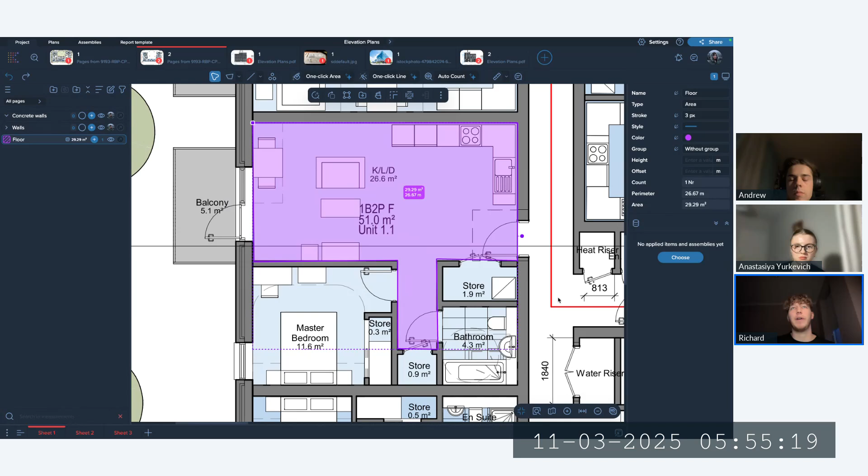So sometimes if I'm trying to do it faster, maybe I will miss some points or not get them perfectly accurate. But AI works with the same accuracy. Again, during our testing, on average, AI will make it more accurate. For one particular measurement, it will have at least the same level of accuracy, because AI tries to make it as accurate as possible.

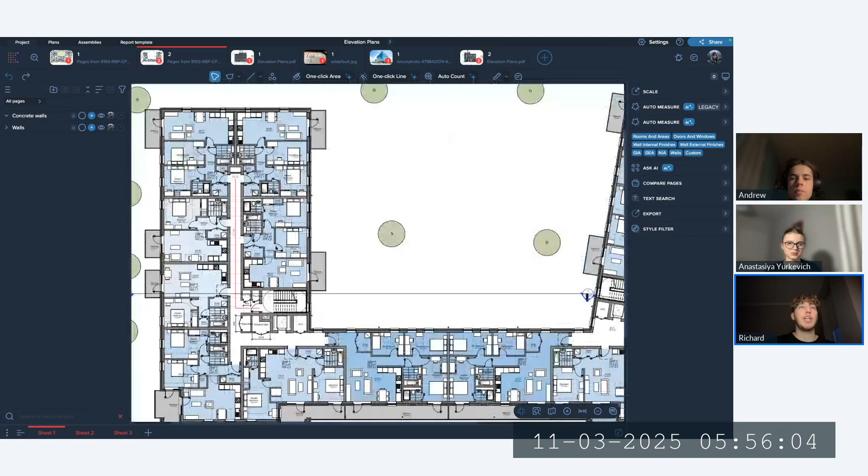If we speak about overall accuracy, it's about 99%. Sometimes AI creates some errors you don't need, but after a quick validation, you can easily delete some measurements or create ones which were missed. The main thing is you always need to check what was measured, how it was measured, and make adjustments if needed - mostly deleting, reclassifying, or moving into a custom breakdown, maybe splitting walls by type. But if we speak about geometrical accuracy, it's extremely high. Maybe AI would measure something you don't need, but that thing will be measured really accurately at least. So this is the answer.

Right, no precision comes without validation. So always validate what the AI gives you. That's right.

Another question - I also saw a nice comment, like a compliment from someone who's been using the software for 2 months and found it really helpful, thanks to Andrew for helping onboard. So thank you very much for leaving this comment.

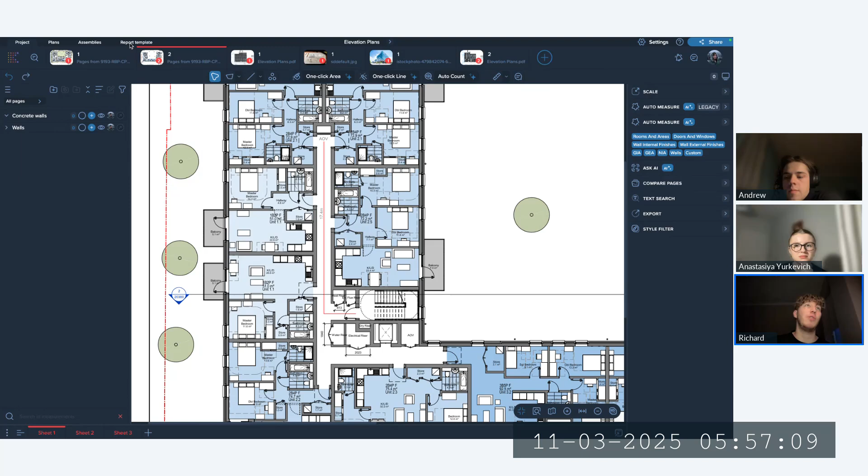Yes, this is exactly the feature Andrew talked about. Unfortunately, I'm not able to show you this right now quickly, but basically in Kreo, we can set a report template based on your particular needs. You just share a couple of best practice documents, and then we set them up for you. If you need a BOQ, we set up a BOQ, cost plan, proposal or quote - no limits mostly, because this feature is based on Excel. In the end, you get an exported Excel with your own format, company logo, colors, styles, and so on. So basically no limits here, but we just need to see how your file looks like. We can export mostly anything there.

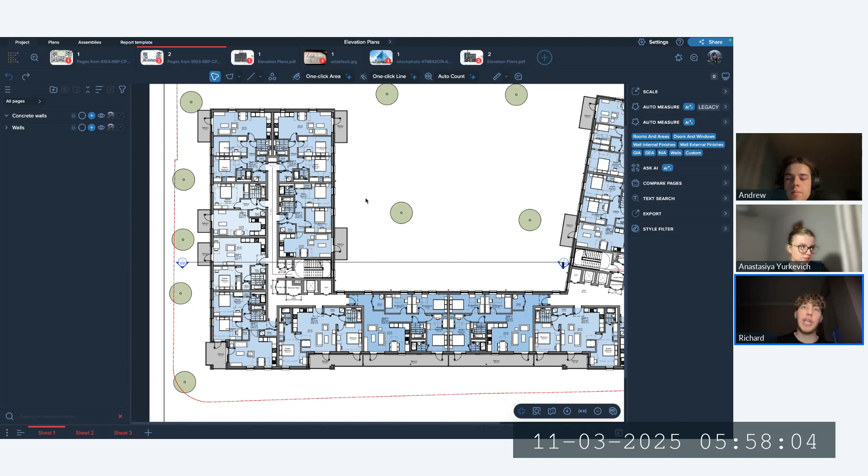Thank you. How does your software detect the center line of the walls? So how the center line is detected - it tries to measure the entire wall, and then it tries to create the line in the middle. You can basically see this when I press walls, it goes through the drawing and tries to highlight - we just hid this for now, but under the hood it tries to measure the entire wall, and based on this it tries to detect the thickness. Another thing is to build the center line here. So that's how you get center lines.

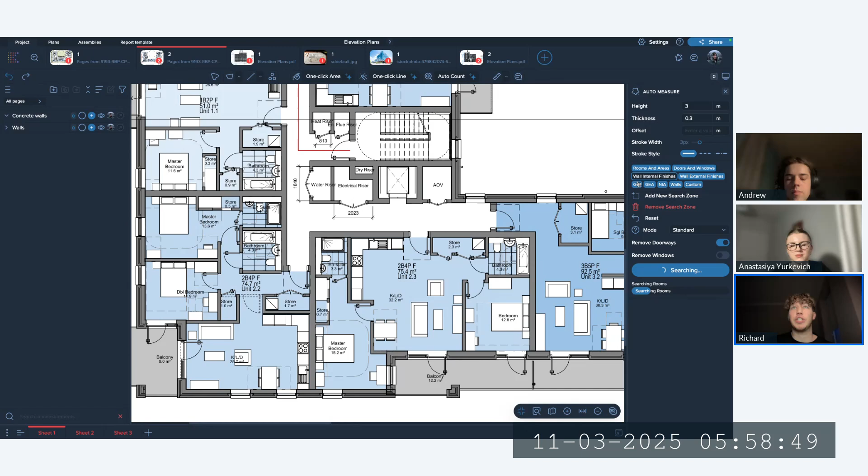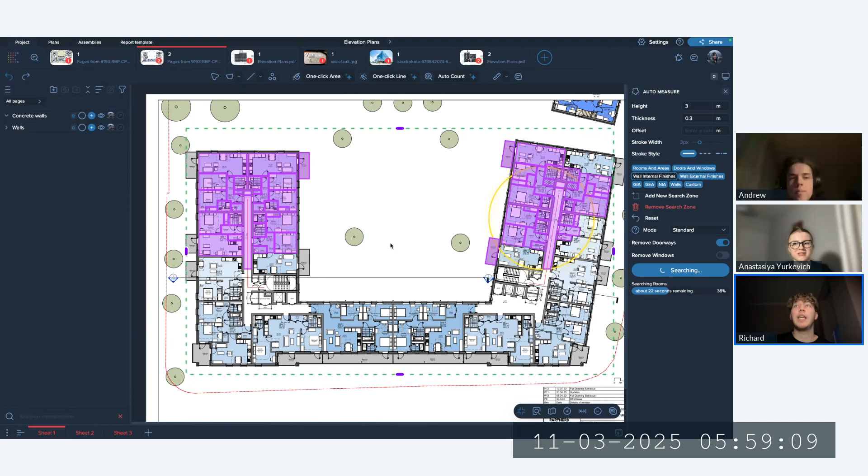In addition, if someone asked about partitions, we have another category called wall internal finishes. This category will measure your wall internal finishes based on the internal side, creating a couple of measurements from each side. It will take a bit of time here because it's a pretty big drawing, but this category, wall internal finishes, will measure all the walls by internal side.